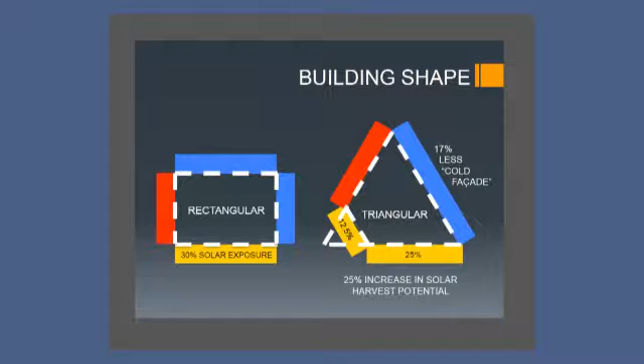So Crestone has this reputation as kind of a laboratory for experiment in energy conservation and in passive design. So obviously that had to be a major component. So the building is fundamentally triangular in shape, which allows us to have 25% more south-facing glass, because rather than a rectangle, it's a triangle. And so 1/3 of the length of the building is right where we want it to be. So that was the first choice.

The building entrance is very evident as one approaches by automobile. There's a drop-off point under a canopy at the front of the building, and one enters on the northwest side.

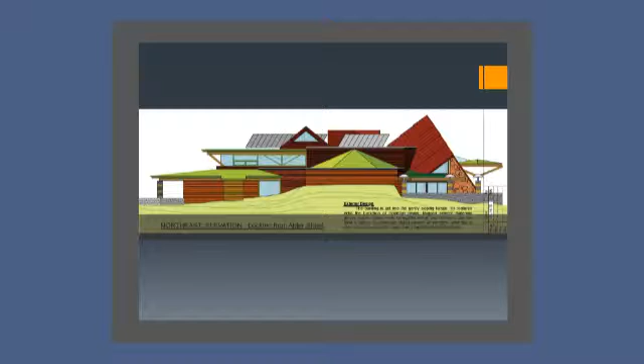So the northeast side of the building is the cold side of the building, and that is shouldered into the terrain. The site slopes gently from the northeast to the southwest. So the building is kind of pushed into the shoulder of the site to protect that northeast exposure. And that protects our building from the cold and insulates us.

The building entrance is on the northwest from the parking area, and then the south facade is what we use for our solar collection and heat distribution system. So then the next question becomes the functionality of the library itself. And using the consultant's program for the building, in which they detailed every lineal foot of shelf space that's required for the building, we located every one of the required spaces, the main space being the children's library.

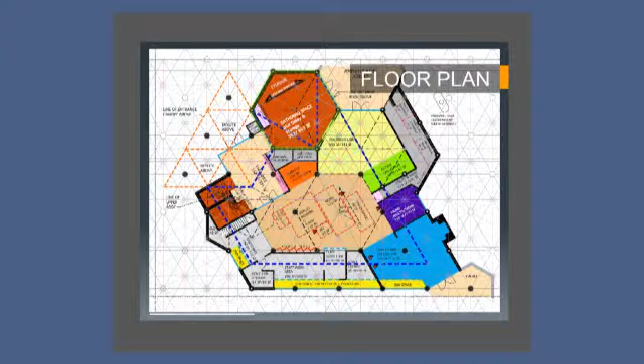The children's library is probably the largest space aside from the gathering space, and it's designed to intrigue our little ones. So we felt that what was needed here in Crestone was a building built with local materials. And we began to look at the log construction in and around the area, the original log construction, but in a different way.

Instead of it as the exterior shell, what about using log as the structural material instead of steel? So it happens that a heavy timber of a certain size has a 2-hour fire rating. In other words, the heavy timber structure of a log building does not have to be covered up with drywall. So peeled logs became the desire for the structural system. And then a structural system had to be developed that could span the kind of distances that a steel building would do.

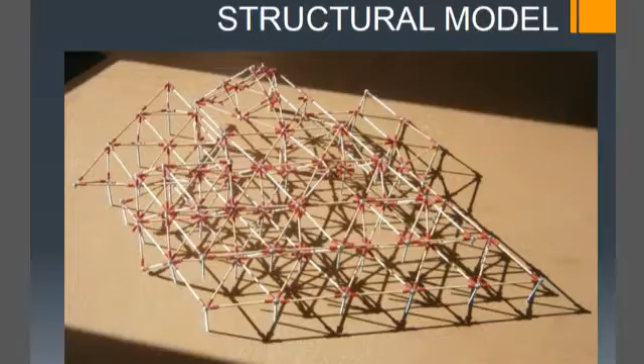So we went to the design of the honeycomb and studied the activities of the honeybee and the structure of the honeycomb. When one strips away all the webbing of the hexagonal prisms that make up the structure, and one looks at what's left, which is just the structure itself, it's an absolutely supremely efficient structure. And then by reconfiguring it and shaping it to our uses, we're able to create the larger spaces of the gathering hall, or the gathering space, and the central hall, and all the other spaces as well.

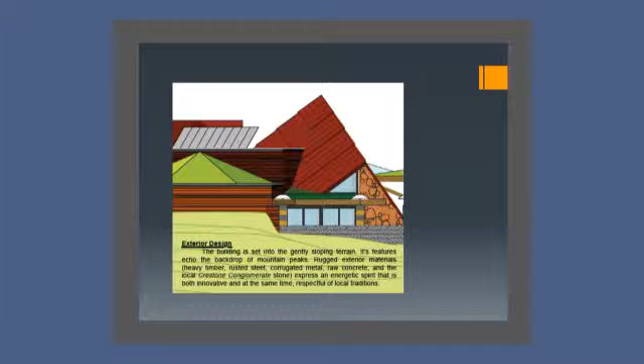So, glass, rusted steel, conglomerate stone, concrete, you can see, and heavy timber. So you can see that it's all a palette of compatible materials that are appropriate to our area. So if you then look at the elevations, you can see the use of these materials and how they're expressed and how the building is formed. And then we look at the image of the building from a distance, and we see that the mountain peaks behind it are reflected in the roof forms.

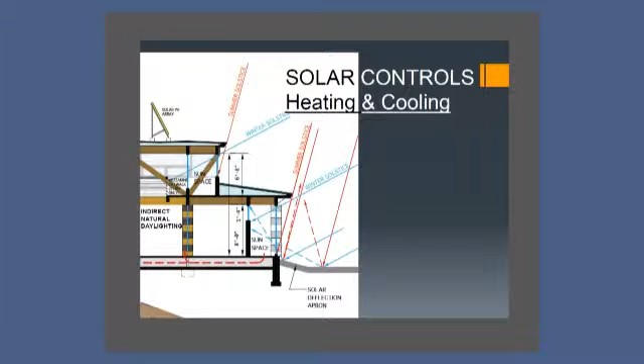And the northwest side of the building is opaque to that hot summer sun, and the northeast side of the building is opaque to the cold winter temperatures, and the south in every aspect from sunrise to sunset in the winter is capturing the heat that we need to heat the building. So that in sum is how we arrived at the final solution.

So the board has started to kind of create a big picture map of how we're going to get to the place we need to be, which is essentially a $2.5 million capital campaign. We've also tried in the community to get a steering committee together and have had some good success with that, but there's a lot of worker bees in that group who want to do stuff, but they need the roadmap, the big picture plan. So we're hoping that a campaign manager and the plan that we're putting together will help those folks have a clear direction on what their role is and what we need them to do.

But our goal is to raise the funds privately through several mechanisms. One is, of course, major gifts, large gifts from the community. The other thing is that we'll probably go after several government grants. I think we're also really looking for a community champion, somebody who's going to really drive the process. We also are going to have several naming opportunities.